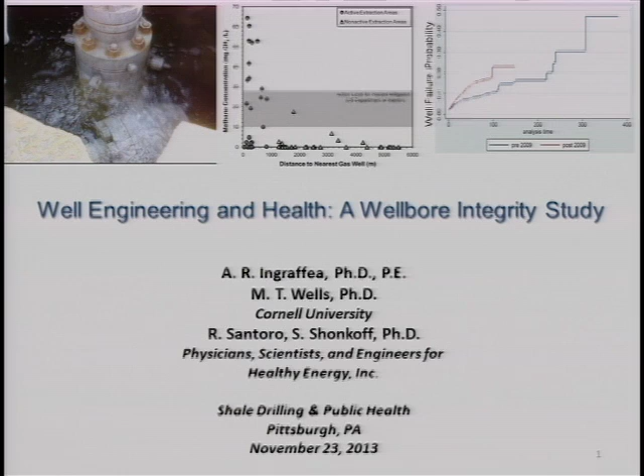I also want to thank the previous speakers for somewhat setting the table, giving the broad brushstrokes as well as some technical details on various aspects of the interaction between shale gas development and human health. This talk is going to be a little bit more focused. If I can use the phrase, we're going to drill down deeply. Just checking your sense of humor here. You'll also note that my co-author on this talk, his last name is Wells. He couldn't help it.

But I'm going to be talking about a very specific aspect of shale gas development which can lead to human health effects, and that's this issue of leaking wells. It was briefly alluded to by Bernie's talk and also by Robert. So I'm going to have to explain some of the industry terminology.

The title is wellbore integrity. That doesn't mean anything to anybody in the room. Wellbore integrity is the phrase that the industry uses to describe whether a well, a hole in the ground with steel casing and cement, whether that design has been executed as planned and whether it continues to function as designed. If it doesn't, the well has lost its integrity. Another one of those fancy words in oil and gas stuff.

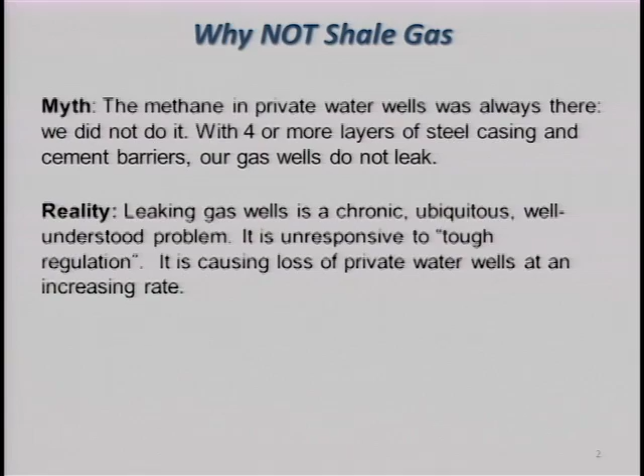But the issue in particular, here we go, is there's a myth. Bernie talked about obfuscation. I use the word mythology. It's a polite way of saying they lie. The myth is that the methane that's being discovered more frequently in people's private water wells, and as Bernie pointed out, if it's methane, that's a precursor to other things. The methane in private water wells, it was always there. We didn't do it. Obviously, our commercials show that there are 4 or more layers of steel casing, each of which has a cement gasket behind it, so our wells don't leak.

I'm going to try to convince you that there's an alternate reality, a truth, and that is that leaking gas wells are a chronic problem. Those of you who are health professionals know what chronic means. I've had chronic back pain for 30 years. It's a chronic problem. It's ubiquitous. That means it happens everywhere — Gulf of Mexico, Pennsylvania, North Dakota, offshore wells, onshore wells, gas wells, oil wells, water wells. Wherever you punch a hole in the ground and try to create a structure of a hole in the ground, steel casing and cement, they leak. And it's a well understood problem because the industry has been trying to solve it for over 100 years, and it can't, not completely.

So the key issue is, given that wells will leak, how often do they leak? And what relationship exists between the spatial intensity of leaking gas wells and the spatial intensity of people's private water wells? Again, renaming the question often leads to a better answer. I would also point out that the reality is this problem is completely unresponsive to tough regulations. Every state in the country that has shale gas drilling now claims to have the toughest regulations, including Pennsylvania. But I'll try to show you that this problem is continuing to cause and will continue to cause loss of access to private drinking water wells.

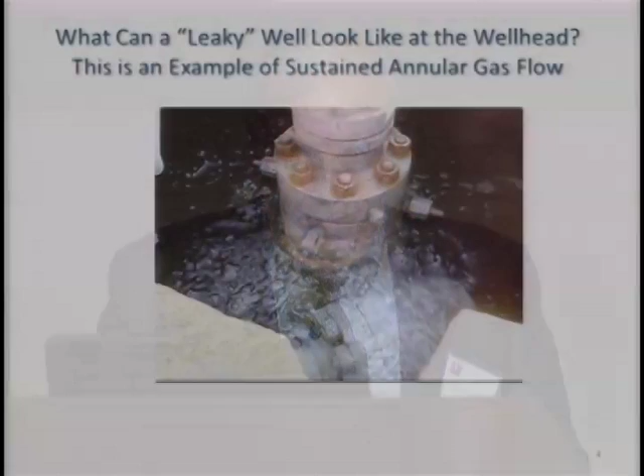So here's my only video of today. I hope you can see it clearly. I'm going to use the pointer here because I'm not sure that I can— do this? No, doesn't work. I have to use the pointer. Be patient with me. Oh, it did?

Okay, so this is the wellhead. You're standing looking at where the well comes out of the ground. That's the production casing, the steel pipe that's supposed to be transporting natural gas and other natural gas liquids to the surface. That's the only place these hydrocarbons are supposed to appear at the surface, inside that steel pipe.

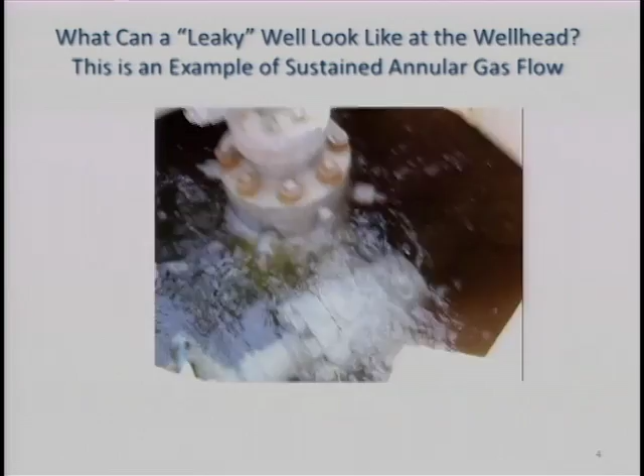So the video I'm going to show you now shows that in this particular well, which happens to be a Dimock well — hope you can see it — it looks like your hot tub. There's bubbling occurring in the cellar. Those of you who have cellars in your homes, if you ever had bubbling in your cellar, you've got a problem. The industry has problems with bubbling in their cellars. So this very rapid gaseous emission is methane and other hydrocarbon gases coming up outside of the production casing. This is an example of a well that's leaking. It's not the only way to find out whether a well is leaking, but it is a way. There's your wellhead, so you got oriented.

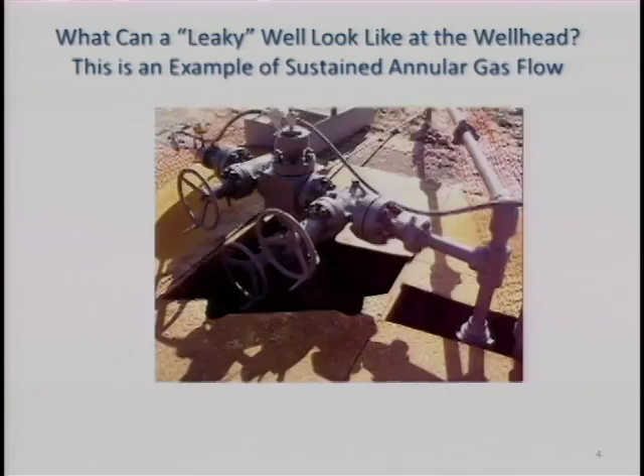Problem now, the question to ask, if I can get this video to stop. I guess I can't. This is not my laptop, I'm not used to it.

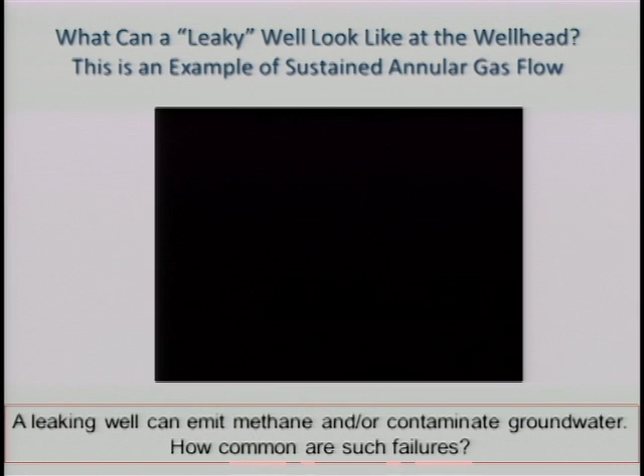A leaking well can emit methane. It can go directly into the atmosphere, becoming a possible precursor to ozone formation and local air pollution, as well as a very potent greenhouse gas contributing to climate change. While it's on its way to the surface, outside the production casing where it's not being safely transported, it can come into contact with underground sources of drinking water, your drinking water well. So what do we need to know?

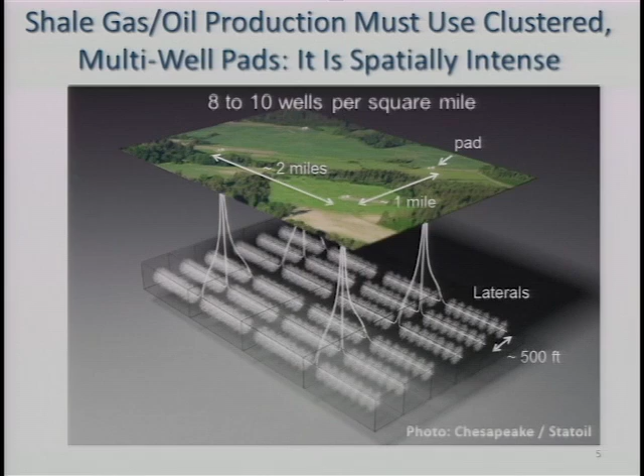We need to know the spatial and temporal relationship between the frequency with which wells fail and the nearby water wells. An aspect of shale gas development that you all know well is that it's spatially intense. It's impossible to economically develop gas from a shale formation without drilling 8 to 10 wells per square mile. I hope you heard that—8 to 10 wells per square mile.

Pennsylvania currently has about 6,800 shale gas wells out of an expected 100,000. So things haven't really started in Pennsylvania yet. One of the slides you saw earlier this morning about that crazy study about cancer—well, we've only had 6,800 wells and we've got 100,000 expected. What can we expect to see at this point? We can see the tip of the iceberg. But the whole idea here is you've got to drill a hell of a lot of wells.

So there's going to be intense spatial intensity. It's not the number of pads, it's the number of holes you punch in the ground—that's the number of wells. If each of these pads, you can see 4 of them in this diagram, each of those pads is going to have 6, 8, 10, 12, 20 wells. It's a lot of holes.

And every time you punch a hole, you offer an opportunity for that hole to leak. It has to be properly gasketed. We're not worried about casing leaks—casing is steel pipe, it very rarely fails. It does, but much more rarely than the cement. The cement is the gasket, the sealant.

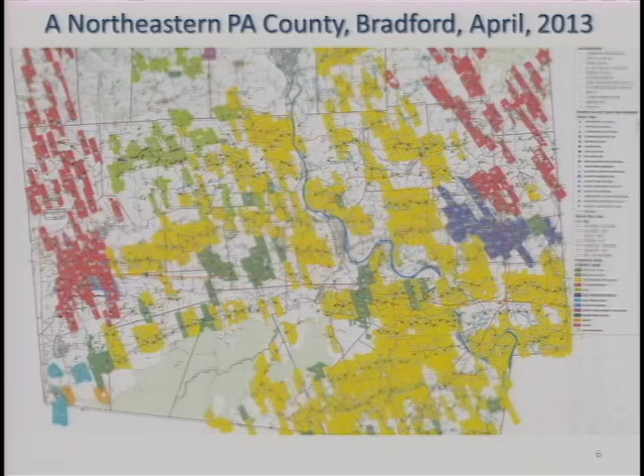So we know that shale gas development is spatially intense. Here's an example of what one county in Pennsylvania currently looks like. This is Bradford County, New York-Pennsylvania line right up here. This is utopia, this is hell. That's the people in Bradford County. The colors here indicate the different operators currently operating in Bradford County. You can see that the county is about half developed in terms of lease, but not even 1/10 of the way developed in terms of the number of holes in the ground. You'll notice that all of these operational units look like little rectangles, roughly a square mile each. They're all oriented north-northwest, south-southeast. That's because of the geology. That's the way it works.

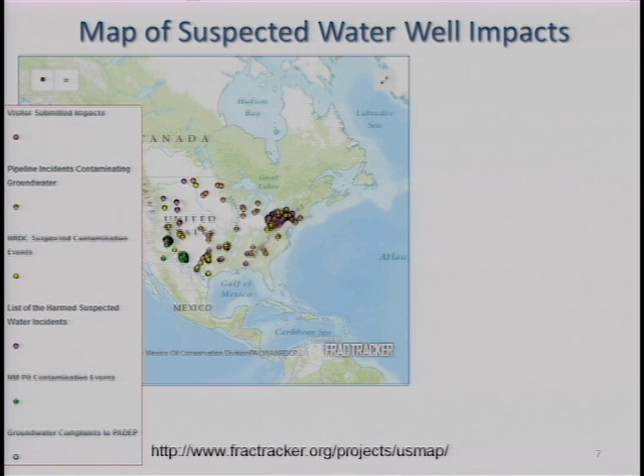We also know that we're beginning to see water well impacts. Thanks to our friends at FracTracker, who are now putting another public service on their website, we can begin to see the evidence with our own eyes of incidents of well water contamination. There's the zoomed out US version. Here's the zoomed in. Let's go back one here.

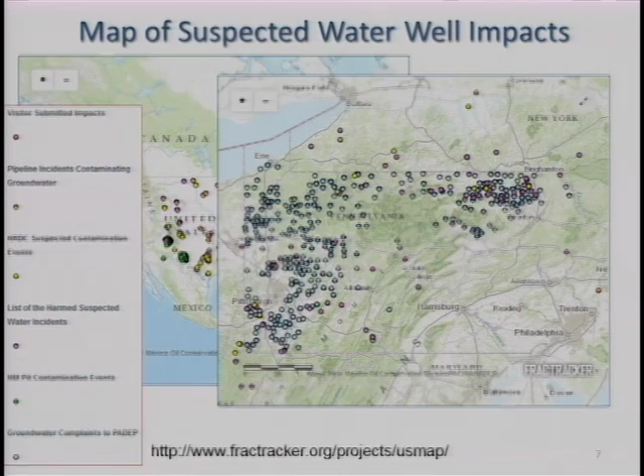There's Pennsylvania. All the blue dots are incidents of well water contamination reported to the Pennsylvania Department of Environmental Protection, which has determined as of a year ago that 161 private water wells had in fact been contaminated—not by fracking, like Bernie pointed out, I try not to use that word—but merely by the fact that they drilled wells. 161 confirmed cases, 6,000 wells. I'll help you project forward in a few minutes what that means for our future.

13 families admitted, of all the families in that area, to losing access to their water wells. So this is not fiction.

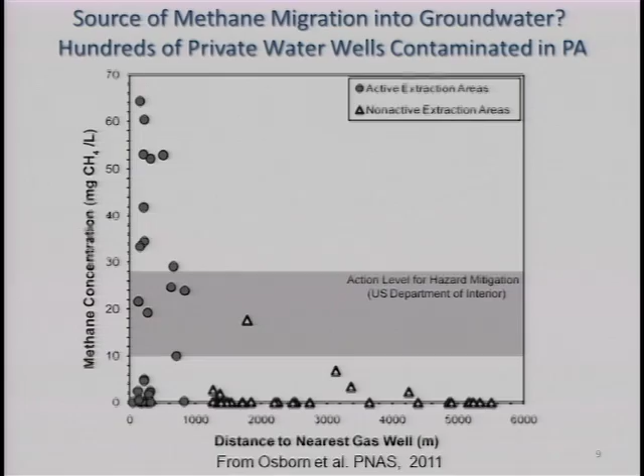It happens. We also know from our colleagues' research at Duke University that there is an established spatial correlation between distance and methane concentration. The horizontal axis is distance between a water well and the nearest gas well, and the vertical axis is the measured concentration of methane in the water well. What you're seeing here is a very strong correlation: the closer a water well is to the nearest gas well, the higher the concentration of measured methane in that water well. That's a correlation, it's not causality. We can't directly relate the concentration of methane in any one water well to methane coming out of any one leaking gas well.

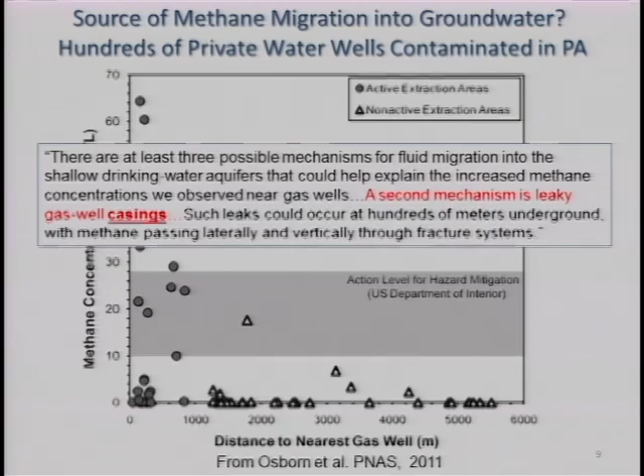But this is obviously something that has to be followed up, and that's what we're doing at Cornell. The people that did that study are not geologists, they're not petroleum engineers, so they conjectured, why might this methane be getting into water wells? Not knowing any better, they conjectured maybe one of the reasons is that the gas wells are leaking. Seems reasonable, and that's what we're following up on, trying to give some factual or at least statistical basis for that conjecture.

So like all good scientists, we started a research project, which I'm about to describe to you in public for only the second time. First time was yesterday. A project that we've been working on for two years.

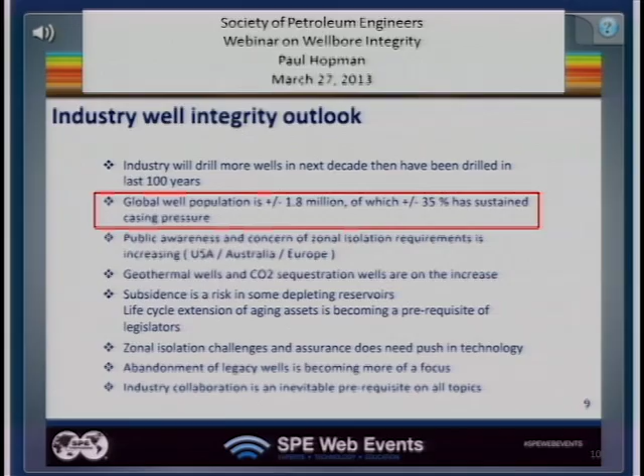The first thing we did was a literature survey. What do we know about leaking wells? What does the industry know about leaking wells? What do regulators know about leaking wells? And what do you, the public, know about leaking wells? Well, the industry knows a hell of a lot. We would hope the regulators know at least as much, and I suspect the public knows virtually nothing. That's why I'm here today.

Earlier this year, I participated in a webinar sponsored by the Society of Petroleum Engineers, SPE. I'm a member, and the title of the webinar was Wellbore Integrity. You know what that means. So clearly the industry can't be saying there isn't a problem, otherwise they wouldn't be having workshops on the problem. During this webinar, I was caught up by one slide which said this particular guy had gone off and looked at 1.8 million wells around the world and found that 35% of them were leaking.

I'll let that sink in for a minute. Sustained casing pressure is another name, another acronym: loss of wellbore integrity, sustained casing pressure, sustained casing vent flow, annular flow, loss of zonal isolation. It's all obfuscation. What they mean is the well is leaking.

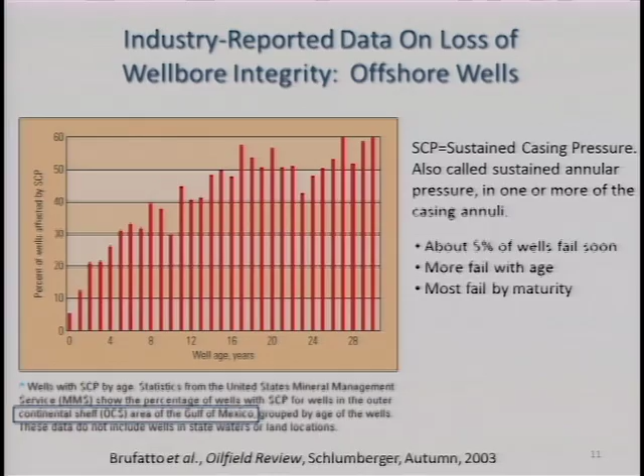There is a sense of humor here.

Okay, well, though the industry criticizes me a lot for everything I say, and even my jokes I get criticized for, but probably because I'm very poor at humor. So they said, well, those are offshore oil and gas wells, they're not shale gas wells. Some of them are 30 and 40 years old. You can't expect that to reflect modern shale gas development in a state which has really tough regulations, in which there's a wide variety of operators using the best available cement, best available technology, the smartest people, and they're taking their time and doing right by you.

Okay, fine. So I went and found some more of the industry data. This is from 2009 — 340,000 gas wells onshore in Canada. Then I get criticized because they're Canadian wells. Let me tell you right now, I would much rather have you, the people of Pennsylvania, be operating under the regulations of Alberta than the regulations of Pennsylvania.

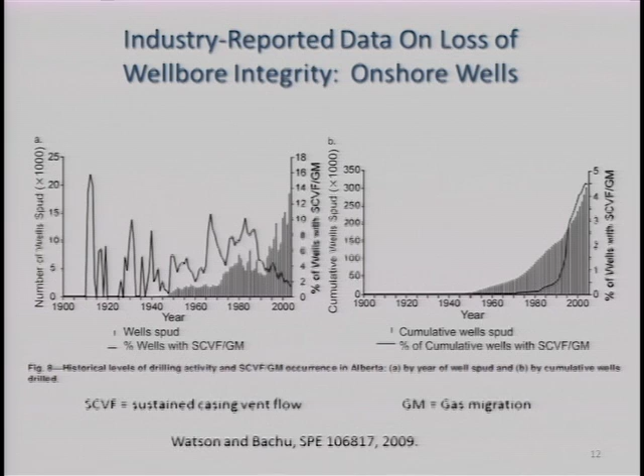Having said that, this paper points out very similar things. New wells fail somewhere around 5%, and as the wells age, the failure rate goes up. This particular paper began to study modern shale gas development by looking at wells that were deviated — that's another one of those fancy oil and gas words that has sexual connotations. It's all guys.

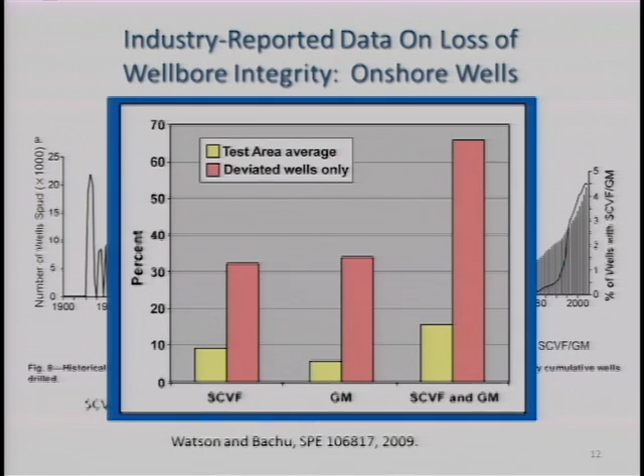A deviated well is one that's not vertical. As you know, all production shale gas wells are directionally drilled, they're deviated. And so for sustained casing vent flow, gas migration, in the particular area where they studied only deviated wells, they found that about 65% of them were leaking. It's much more difficult to put a gasket in a deviated well than it is in a straight well.

But once again, I'm criticized: those aren't wells that are representative of modern practice in a state which has very tough regulations.

So a little bit more industry data. This is out of a website of a consultant to the industry whose job it is to go out and fix leaking wells, but then he writes papers that say wells don't leak. But this is data from his own website. And what do you notice? Have you seen the shape of these curves before? You see young wells somewhere around 5%, and as the wells age, the failure rate goes up to 25, 30, 40%.

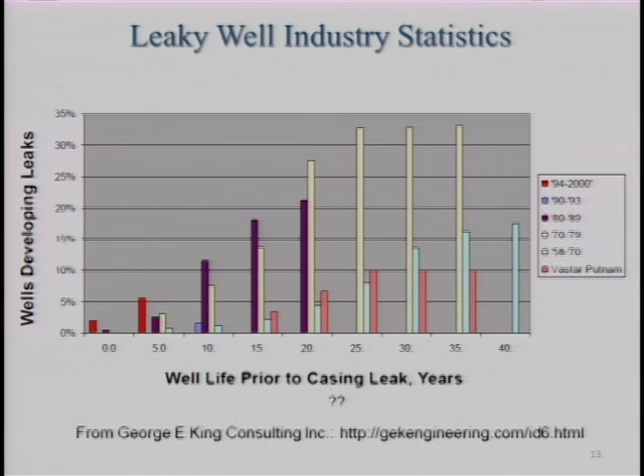Familiar theme. And finally, we went to the most principal source of information absorbed by regulators nowadays in Ohio. That's the other state — there's utopia, there's hell, and there's near hell. So Ohio is following in your lead, and they're all going to get rich. The front page of the Columbus Dispatch on August 8, 2013 announced that gas leaks from shale wells are rare. We decided not to use that as a peer-reviewed reference.

So we decided to do our own study. We accepted the criticisms of our use of industry data to explain that you should be expecting wells to leak. And we went to a state where there is modern shale gas development, a state which claims to have the toughest regulations in the country.

Pennsylvania. We went to the Pennsylvania Department of Environmental Protection database, which is online, hiding in plain sight. Anybody can go look at it. We created our own database by extracting gigabytes of information from that database, which included information on all 41,381 oil and gas wells drilled in the state of Pennsylvania during a 13-year period ending on December 31st, 2012 — unconventional, conventional, oil and gas, all 41,381 wells, and 75,000 inspection documents for those wells. It's a lot of information.

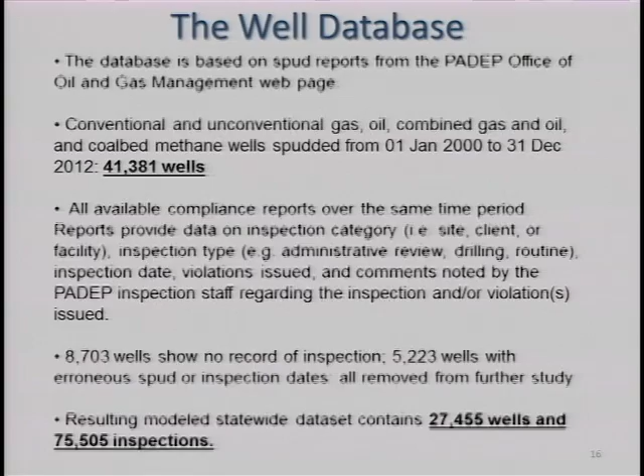1 out of every 5 wells in the database didn't have an inspection report. Now, that either means the well was never inspected, or it means the inspection reports aren't in the database. So we lost a fifth of the database right off the bat — not our fault. We also found out that of the 5,223 wells for which there were inspection reports, the inspection reports were dated before the wells were drilled.

Well, how do you do that? Obviously there are entry errors. So we don't know how to correct entry errors, we don't know which date was right, which date was wrong. So the only thing we can do as researchers is throw that data out. So then we were left with 27,000 wells, but with 75,000 inspection documents — still a very substantial statistical base from which to derive information about past performance and predict what's going to happen in the future.

Second thing we did was to mine the data, try to figure out relationships that weren't readily apparent by just looking at reams and reams of numbers. There's software to do that, so we used very modern software to try to find connections, relationships, and correlations among all the data entries. For example, we wanted to know how many wells had received violations for leaking. It's against the law in Pennsylvania for a well to leak.

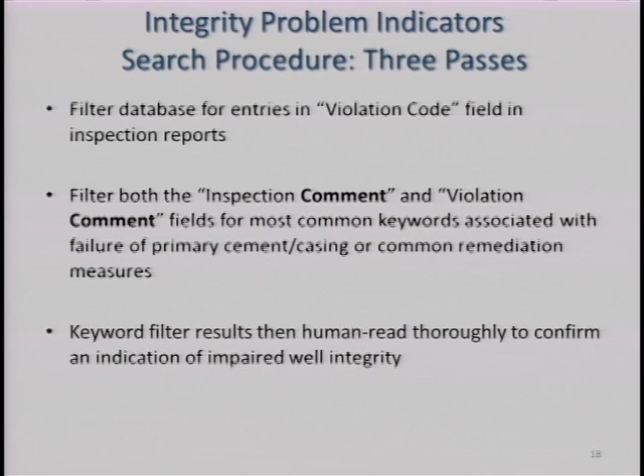So you would naturally expect that an inspector who goes to a well and sees a leak, like the video I showed you, would immediately issue a violation. Silly us, that didn't turn out to be the case. We found many cases where an inspector would go, see a well was leaking, write comments into the comment sheet and say, this well is leaking — in some extreme cases, this well is leaking so badly the pad should be evacuated immediately. No violation.

Watch me — wink, nod. I hope the next time you get stopped on the Pennsylvania Turnpike for speeding, you can do wink and nod and not get a violation.

Okay, so that caused us to not only look at whether violations were issued, we had to read all the comments in all 75,000 inspection reports to find out whether an inspector had seen or detected that a well was leaking but had not issued a violation. This was all done through software, using word searches on keywords. But that's not foolproof, so then we had to go back and make sure that what the computer claimed it had found as evidence of a well leaking was in fact evidenced by reading all those comments.

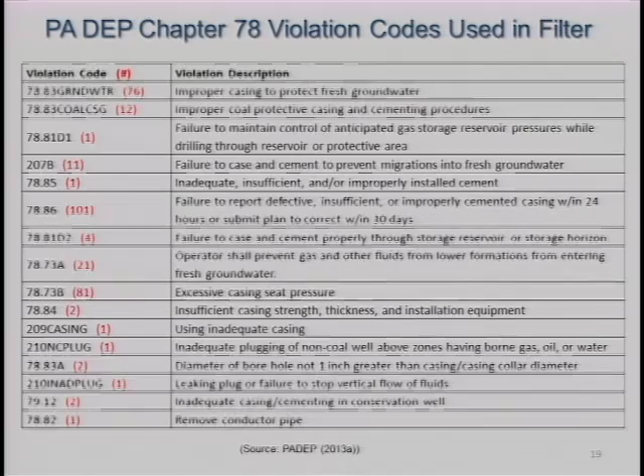So here's what we found for the wells that had been issued violations. Here are the various violation codes in the Chapter 78 regulations of PADEP. These are all the ways that a well could have been issued a violation for leaking. There's not just one thing. It's not simply that if your well leaks, you get a violation. There are many ways a well can be cited for leaking.

What we found is that the most common of these violations was that the well was leaking, the operator knew it, and didn't tell anybody. Pennsylvania law says if an operator determines that its well is leaking, it has 24 hours to tell the PADEP. That means many of these wells could have been leaking for 25 hours, 25 days, 25 months, until the next inspector came around. There are no set inspection schedules. As you'll see later, some wells haven't been inspected in 10 years.

So that was the most common. There are a lot of others, but the red numbers indicate how often we found these violations in the database that were found and issued.

But as I said, many times there were no violations, so we had to do keyword searches. The most common thing we found was comments issued by inspectors that said there's bubbling in the cellar. That's what you saw in the video. No violation.

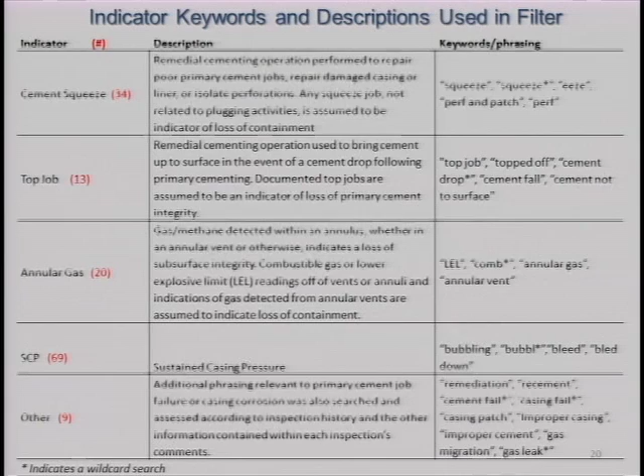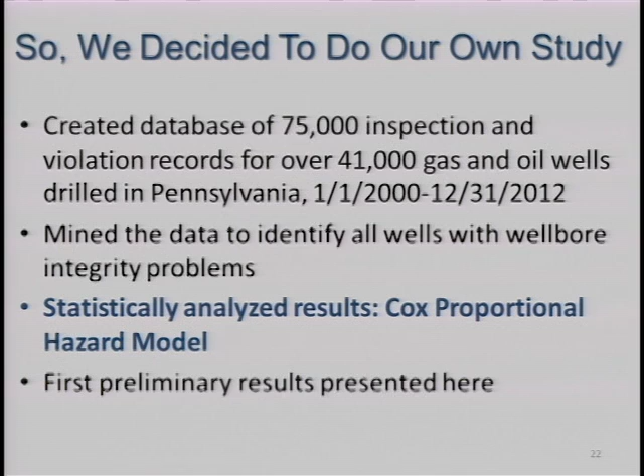I'm going to skip all the big tables and numbers and get to the meat of the matter. So once we had figured out which data was reliable, and which wells had in fact been leaking, either by having received violations or by comments from inspectors saying the well is leaking, the next thing we wanted to do is extract relational information and see patterns.

And to do that, we used a modern probabilistic statistical technique called the Cox proportional hazard model. Anybody use it this morning? Anybody a statistician? No, I am not a statistician.

So we went to Cornell University - I am at Cornell University - we went to Marty Wells, who happens to be the premier probabilistic statistician at Cornell. He's been a colleague of mine for 20 years. We said, Marty, can you help us understand this data, extract information and knowledge from it? He said, yeah, we should be using the Cox proportional hazard model. It's well known in the medical literature, as it turns out. It's not one-off, it's not freaky, it's commonly used. I didn't know anything about it, so Marty joined the team.

And here's what the model can do without all the technical details. It can tell us the risk of cement and/or casing failures for a well, even though we have incomplete inspection information from that well, based on performance of other wells.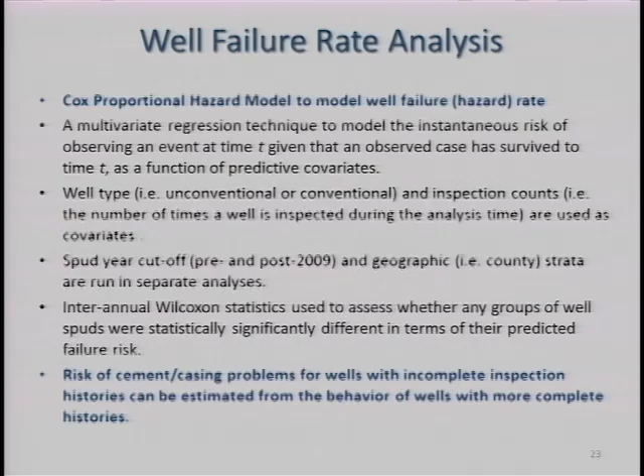Now, what is a complete inspection record for a well? Let's make sure we understand each other here. How long would it have to be? Answer the question - how long would we have to inspect a well in order for us to have a complete inspection record? Forever. Are there any wells on the face of the earth for which we have complete inspection records? No.

Therefore, if we want to predict the future, what's the only thing we have to go on? The inspection records from the previous years. What this model does is allow us to extrapolate into the future in a statistically valid, testable manner. It tells us the uncertainty in our prediction - what is likely to happen for a well in any class, given information about that well's history and similar wells' past history. Got it? Good.

All right, so here we go, I'm getting to the meat of the matter. I have to warn you that the data and interpretation I'm about to give you is not yet peer-reviewed. We have written this paper, and it's about to be submitted to a prestigious peer-reviewed journal. Please don't quote this to anybody, and when they're making the video of this, we're going to have to black out these slides because I don't want people to misinterpret anything I'm saying.

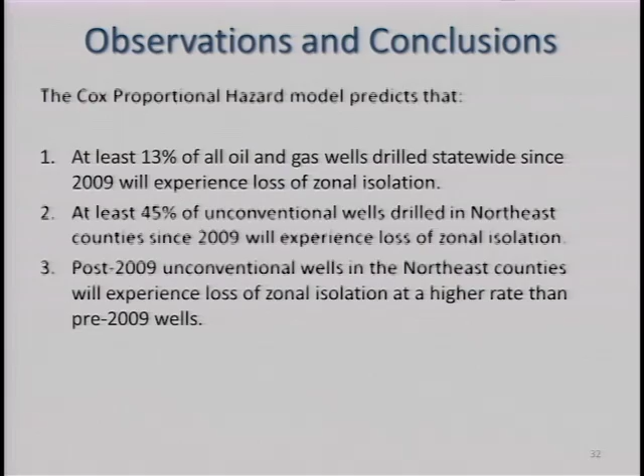And finally, about this Cox proportional hazard model, if you're living anywhere in Pennsylvania right now, we are very confident that we can say that at least 13% of all the oil and gas wells drilled statewide since 2009 will experience leakage. At least 13%, for reasons I just pointed out. In some areas, much higher, but at least 13. And if we're going to have 100,000 shale gas wells in Pennsylvania and the Marcellus alone, that's 13,000 leaking wells.

The science we have yet to finish is the hydrogeological connection. If I've got 13,000 leaking wells, how many water wells are going to be contaminated? Simple ratio says if we have 161 confirmed cases after 6,800 wells, multiply 6,800 by 16, multiply 161 by 16, we're going to have something like 2,000 contaminated water wells, at least.

At least 45% of the unconventional wells drilled in the northeastern counties since 2009 will experience leakage. And post-2009 unconventional wells in the northeastern counties will experience a higher rate of failure than older wells in that region. So that's the message for today.

It's not a direct answer to health impact. It's an indirect answer because there has to be a source. The source is the leaking wells. The pathway is underground. The exposure is drinking the water, bathing in the water. So I have to continue to work with hydrogeologists. I have to continue to work with physicians to get the chain of evidence complete: leaking gas well, health effect. So thank you very much for your attention this morning. Look forward to questions.

I have tons of questions. I hope you can stay because obviously we can't answer all of them. Let's start with one that says that shallow fracking is now occurring in Pennsylvania, in Westmoreland County specifically. So now these are not the horizontal wells. So how worried should we be about shallow well fracking?